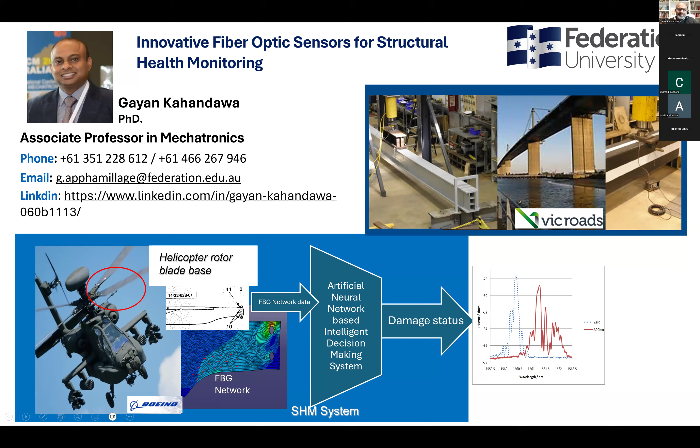But to start with, I will start with my location where I am, and a little bit about Federation University as well. Federation University is in Victoria, over here in Australia. It's the southern tip of Australia, and we have three campuses: one in Ballarat, one in Gippsland, and in Berwick. I am based in the Gippsland campus, but we work across campus many times. It really doesn't matter nowadays the location. That's the situation we have after COVID, isn't it?

So the university has a vision to develop a cooperative education model. That means all of our degrees are industry connected. Our students are industry placed and they learn from the industry as well. It's a little bit of a challenging model for the university, but it is giving us very good results. Our strength is mostly in applied research, particularly engineering, AI, health, and regional development. We have one of the highest graduate employability in Australia for Federation University graduates. We have strong relationships with industry, government, and communities, and we are committed to innovation, regional growth, and student success. So some of these photos I have put up there.

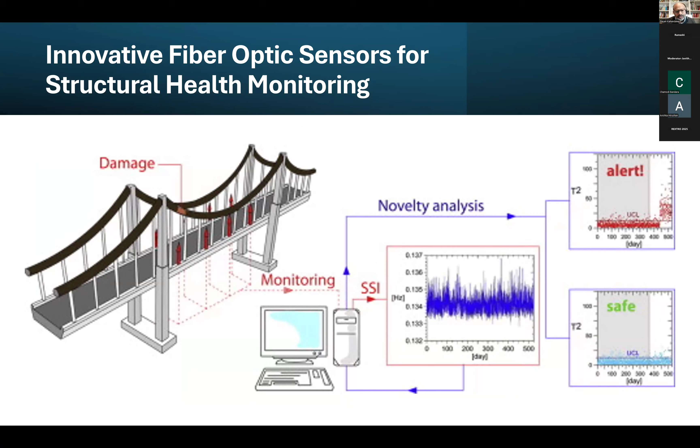introduce the fiber optic sensors, or we call it fiber Bragg grating sensors. Fiber Bragg grating sensor is physically, if you look at it, an optical fiber, right? If you are familiar with the communication industry where we use fiber for communication now, NBN, it's looking very similar to that fiber, right? But there is a slight change in the material.

In this fiber, we have a little bit of germanium. We call it germanium doped fibers. I will explain why we need a little bit of germanium in it. But if I don't tell you, you will think, okay, that looks like a normal fiber, right? So in this fiber, what we do is by using some radiation technique, we can create a grating in it, right? I will explain a little bit more in my next slide.

By creating this grating, what will happen is when we send light through the sensor or the fiber, because of the grating, part of the light will be reflected, right? So by looking at that reflected light, if you can understand the wavelength of the reflected light, we can actually get the idea about some physical properties closer to the sensor, right?

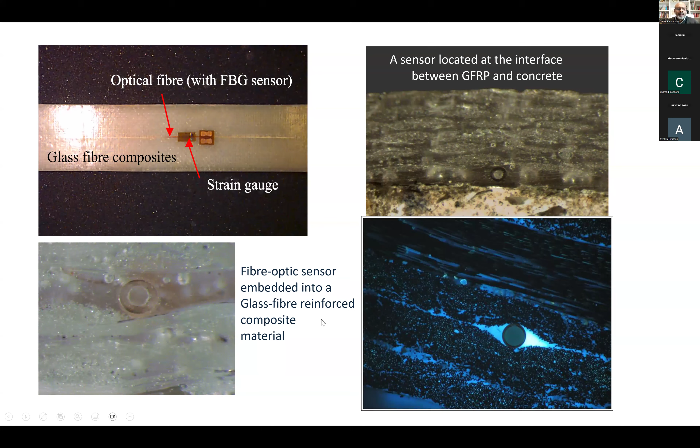So when we embed it, these are some of the samples we created just to see how the sensor is settling in material. So here you can see that's a concrete surface here, and then this is a glass fiber surface here. So we have put the sensor in the interface, and you can see how it is sitting there. And this is actually inside the glass fiber reinforced composites. So that's the sensor sitting inside the material itself. Okay, so that's a big advantage to have that ability to embed the sensors.

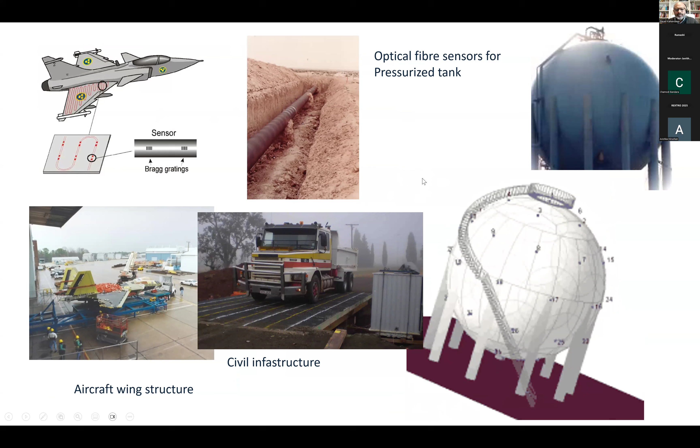So because of that, this sensor is used in many monitoring applications: in aircraft, in defense applications, pipeline monitoring, oil and gas industry monitoring, bridges, like civil structures. So many applications. All right, so when it comes to structural monitoring, there are two parts. One is the sensor part. The other one is actually the monitoring, or the intelligent part, smart part.

So it is more like we are developing a nerve system for the structures, right? So we have our nerve system. If I have a problem in my elbow, I will feel it as a pain or something, then I know something's wrong with my elbow. Then I can go to a doctor, do scans and find out what's wrong. So a similar phenomenon here. If an aircraft can feel its structure, if something's wrong over here, if we can detect that, then we can fix that.

So in most of the applications, because of not having this ability, we have to scan all the structure all the time. So aircraft undergo monitoring operations time to time. You have to take it out of operation and then, using ultrasound or different techniques, scan the structure for damage. That takes time, plus you are losing a lot of money because you have to take it outside the operations.

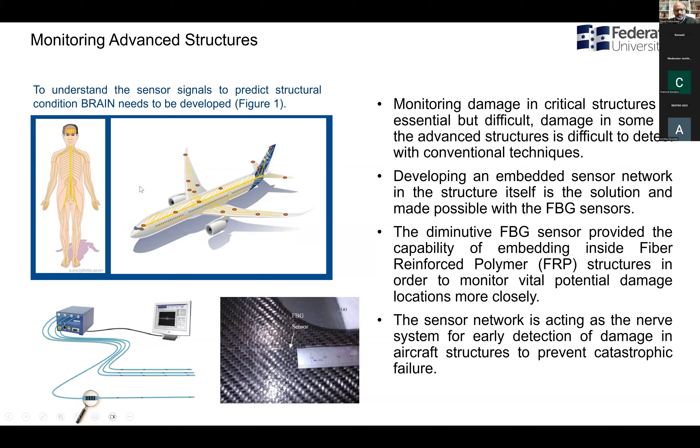But if you can have a nerve system which can detect the damage itself, then we know and we have the confidence to fly the structure. We know that it's safe. And if something's wrong, it will recognize it, and then we can fix it early, before it gets worse. Okay, so this is actually the idea of monitoring. So now I'm going to talk about a couple of projects where we use fiber optic sensors for monitoring.

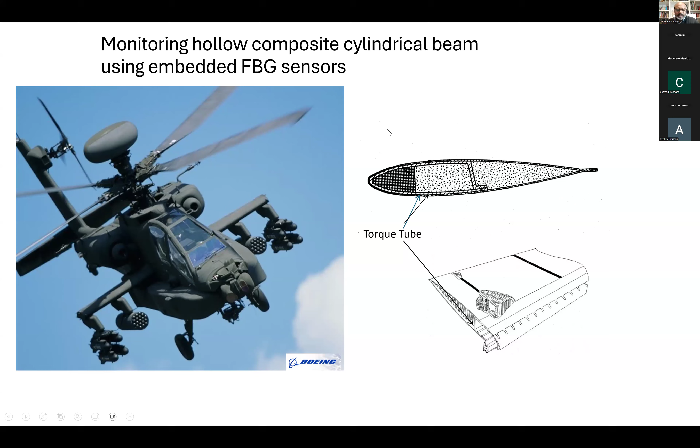This is part of my PhD project with Boeing. In that project, they wanted to monitor some of the aircraft structures and develop techniques to monitor those structures actively. So here you can see a cross section of a blade of a helicopter. Inside that one, they have something called a torque tube. The profile of the blade is to have the correct lift using Bernoulli's theorem, but the force is actually mainly applied through this torque tube. So this is the normal process when we want to do something like this.

So first we understand what is the part we want to monitor. And then we develop finite element models, and by running the analysis, we try to understand possible damage locations or stress concentrations. So if you realize there's a stress concentration over here, a possible stress concentration over there, then we try to put the sensors around that area. And then we create the samples and test them. So in these samples, we have the fiber optic sensors embedded.

Similarly, to simulate a torque tube, we created a sample, did the finite element modeling, and then put the sensors. Inside this, we have created damages as well. In composites, there are a few types of damages occurring frequently.

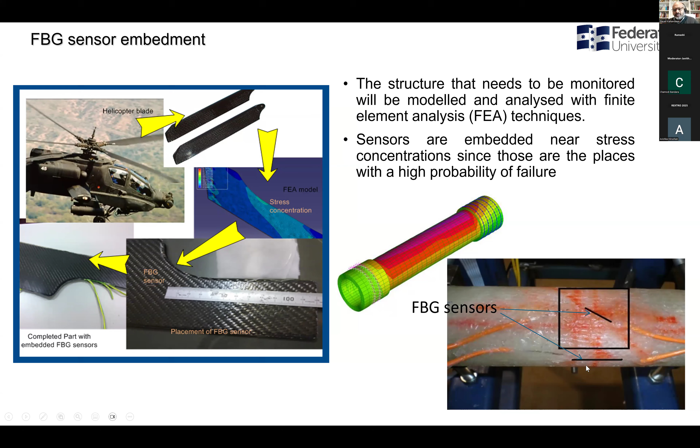One is called delamination. These are laminated structures, right? So there can be debonding between the two laminates. That's the defect. To simulate that, we can create a delamination, and then we put the sensors to monitor that delamination. The advantage with the fiber optic sensor is we can put it very close to the delamination rather than putting it on the surface.

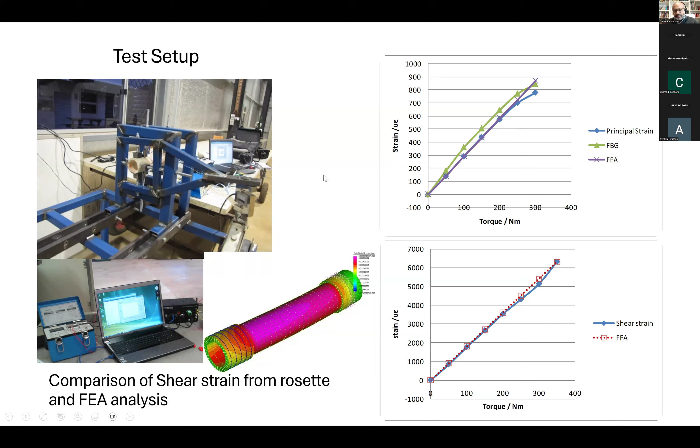And then we had to build our own rig because we need to apply the similar type of forces on that, and then we used the sensors to monitor it. At that time, for surface attachment, fiber optic sensors were working really fine, no problems at all, providing us with very accurate readings. But when we started to embed the sensors, we realized that we have more challenges. So I'll show you what was happening.

Even after embedding the sensors, we can see that the sensor spectrum is a little bit distorted. Normally we should get a very nice peak of the reflected light, but we started to see it is a little bit distorted now, as you can see here. And when we start to load it, that distortion is increasing. So that was an observation we found, and that was a challenge for us.

In this case, as you can see, it's further distorting, but still we can find where the peak is. By calculating the distance between the peaks, we should be able to still estimate the strain there. In some cases we found that there are multiple dominant peaks occurring. Here you can see there are two peaks now. Which peak to consider? One has moved to the compression side, the other one is on the other side. We started to observe these types of things.

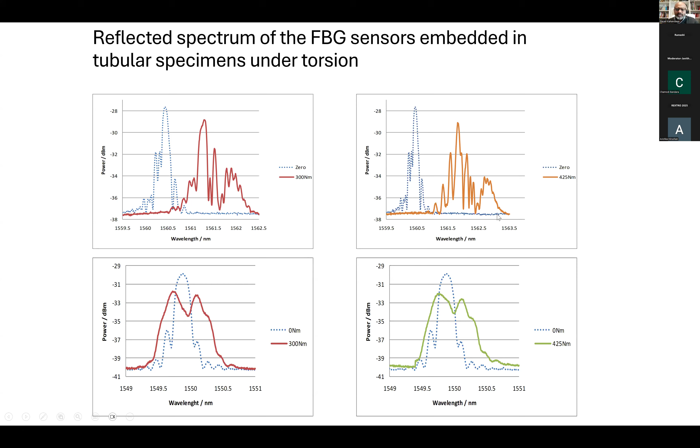That is where our research had to find new ways to deal with this type of sensors. On the surface, no problem, it's working. But once you embed in composite materials, we start to get distorted sensor signals. So we decided to go with some processing techniques. We were looking at AI at that time, how to use AI to help us deal with these types of distortions. And then there was another challenge.

We realized that if we want to feed this into AI, it's an algorithm run on a computer. We have a light signal here, so we need to convert the light signal to an electrical signal to record it. If you convert this to an electrical signal, whatever the reasons creating these distortions are going to vanish. We will end up with one voltage value, because we send this to a photodiode, or PD, and that PD will generate one voltage. That voltage may not mean anything because we lost all the information in the spectrum itself. So that was another challenge.

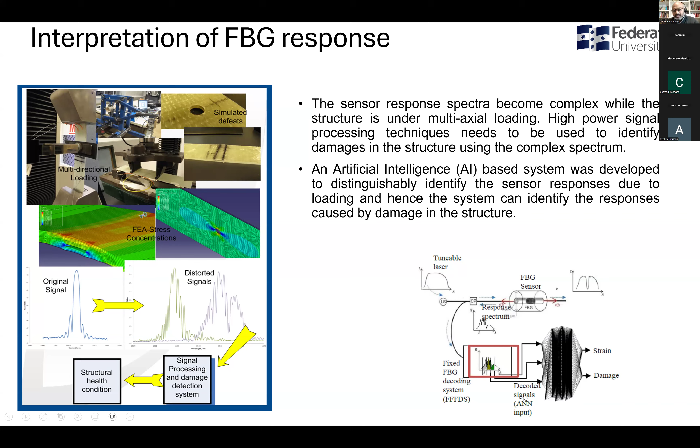At that time, there were a couple of research groups in the world trying to solve this problem, and we were in the same scenario. We couldn't find a way to go from here. And then by reading some other papers, we realized that if you can decode this signal optically, we should be able to record that and feed it into a neural network to understand the reasons or any physical properties we want to measure. So we decided to decode it optically and then use the decoded signal to train a neural network.

So this is what decoding means. Over here, that's the original signal. We send this signal through a few more sensors, acting like filters. This signal is fed through another sensor, which can only reflect this wavelength. So part of the signal will be reflected by this sensor, and some part will be reflected by the second sensor and the third sensor likewise. So we can have an array of filters to filter out the sensor signals. I'll explain it with this.

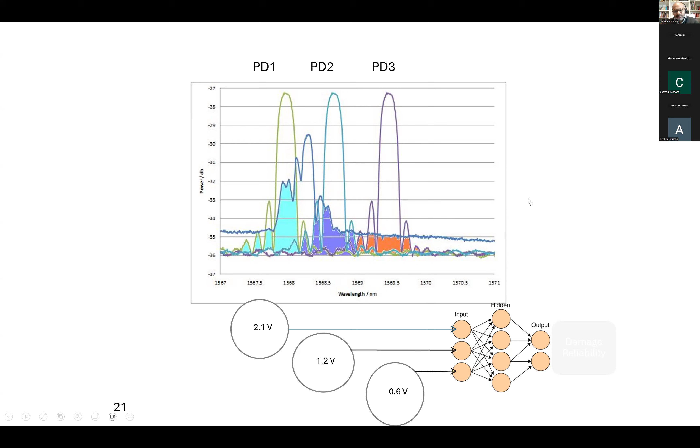Now you can see this is actually the optical circuit we have developed. We send the light to the sensor, and the reflected light is sent through another sensor, and that reflection is sent through another sensor, and that reflection is sent to another sensor. That's what we are talking about, decoding the signal.

So each sensor will be reflecting a different signal from the original sensor signal, right? And then each different filtered signal is fed into PDs separately. So instead of one PD reading, now we ended up with multiple PD readings, photodiode readings. That was used to train an ANN, or artificial neural network.

So the idea was, okay, we have our healthy structure. While it's flying, we record these readings and we train our artificial neural network using that original healthy data. And then as soon as we introduce damage to the structure, the pattern coming out of the PD is changed, because the spectrum is distorting further.

Which is very hard to find with our naked eye, because it's reading like a very irregular signal. We cannot see the change with our naked eye, but the AI managed to detect that changing pattern based on the damage. So we managed to detect the damages with very high accuracy by using this technique.

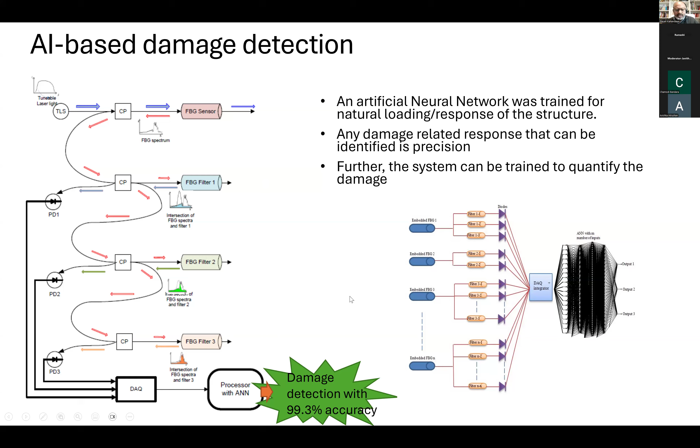So this was a breakthrough for our research, and ultimately this technology, all of this circuit and everything we did, was patented. Because it was with Boeing, we had to patent it with the US Patent Office, and this patent was granted in 2013. So now Boeing is the only company that can use this technology for monitoring. Okay, so that's one project.

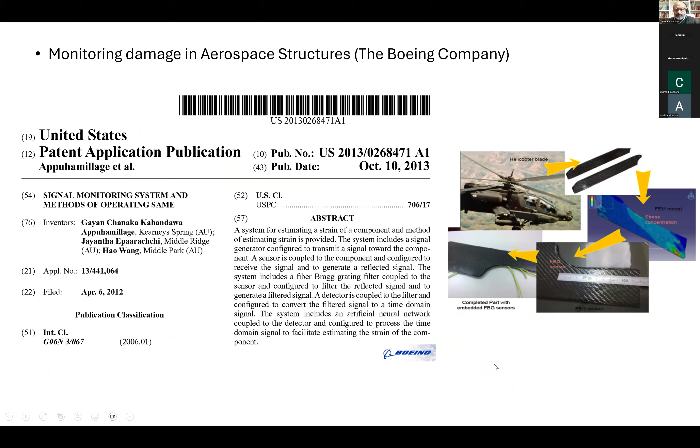And then another project, we had with Petronas, which is a Malaysian-based oil company. They have hundreds of kilometers of pipelines, and with time these aging pipelines are becoming corroded, thinning the pipe, and becoming problematic for them. So for them, we developed glass fiber wrapping to repair the pipes.

And on top of that, we started monitoring this wrapping to make sure that it is not going to fail, because the bonding between the steel and the glass fiber is the location we wanted to monitor. And also because of the thinning, the fiber will load up with the pressure. So we wanted to make sure it is fit for the job.

So similar to the previous application, finite element modeling, applying all the sensors, and then high pressure testing, all of those things, we managed to verify the effectiveness of the damage repair. Because without evaluating this type of technology, they cannot apply it in the field. So they need evidence. So that is what fibers can do. And on top of that, each repair can be continuously monitored using the sensors embedded in the repair itself.

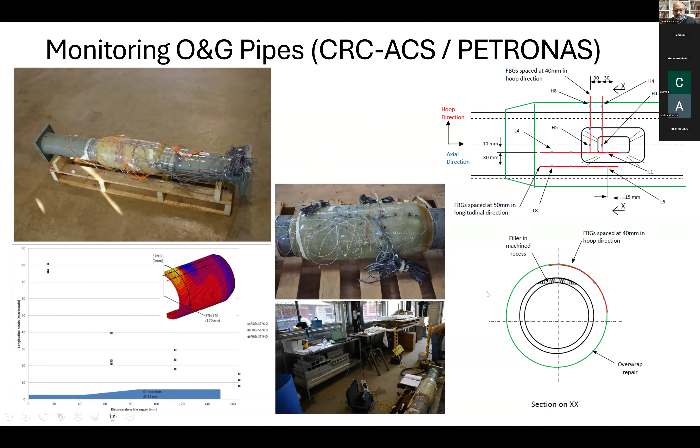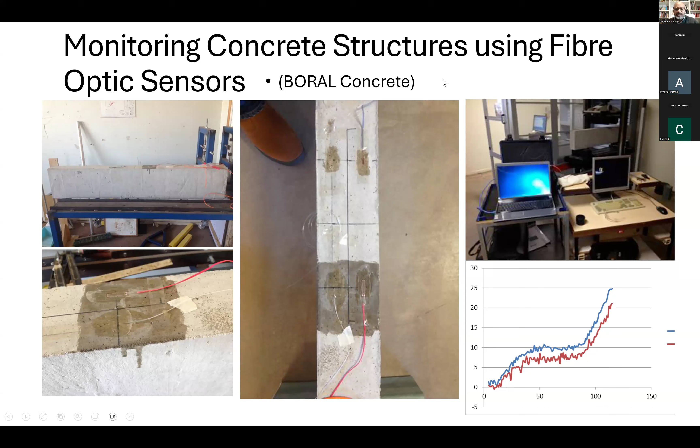So fiber optic sensors can be easily used with concrete to monitor the rebar concrete interfaces, or for many applications. Okay, that is a commonly used technique nowadays. All right, so now we are going to talk about composite bridges.

So in Australia, we have many bridges. Maybe even in Queensland itself we had 10,000 bridges or so. So many bridges. So maintaining bridges is a problem. So we were working on composite bridge girders. These are glass fiber girders, and we have done a trial to demonstrate that it can be used as a bridge building material.

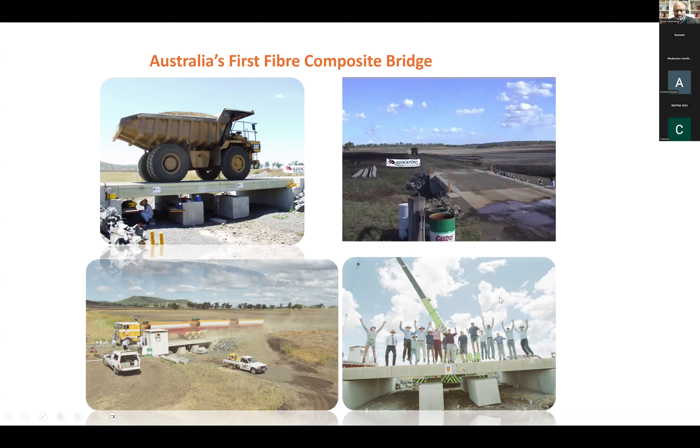Normally we build bridges with concrete or steel, right? So fiber can be used as well. Early days we did it with timber, so I'm going to come to that one as well. So in these beams, there were challenges when we use new material in engineering applications, because sometimes engineers don't trust these new materials, especially when it comes to fiberglass.

Civil engineers don't want a structure to fail as a brittle failure. They want to see yielding, right? Yield and then fail. But glass fibers, as the word indicates, are brittle materials.

It's glass, right? So the failure is brittle. So we need more confidence to use this material in civil applications, right? So that is where our next project is actually leading to.

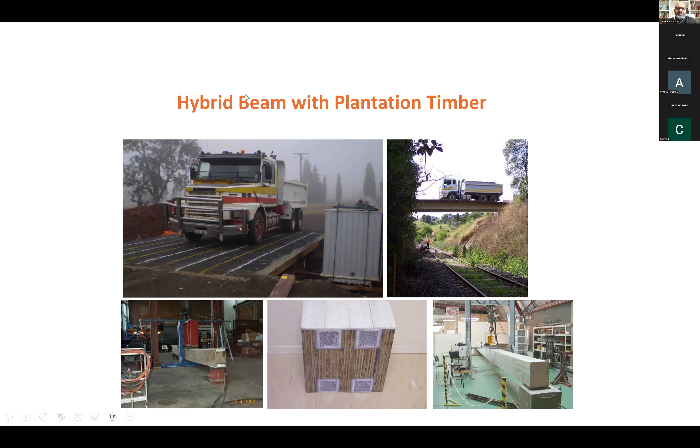So this project is with the Department of Main Roads, which is part of the Queensland government. It's more like the RDA in Sri Lanka. Each state has different road authorities in Australia. So the Department of Transport and Main Roads is the Queensland part of it.

So this department had to monitor about 3,000 wooden bridges still serving in the road network, right? Because Australia is so large, the original timber bridges are still there, and they're maintaining them. Replacing takes time, and we have to maintain those.

So the key challenge they had at that time was when they have a damaged timber girder, it was challenging for them to find a similar timber nowadays, right? Because the timber industry is now not as large as before, they couldn't find the correct timber, and they have 3,000 bridges to maintain. So they reached out to develop fiber composite girders to replace timber girders, right?

So it's not replacing the whole bridge; we are replacing one or two girders, as needed. And for that, we were designing fiber composite girders. Why fiber composite? There are a few reasons. One is if you use steel or concrete, they're too heavy, because these structures are not designed to take steel or concrete girders, right? If the girder is heavy, you have to replace the supports as well, which is expensive.

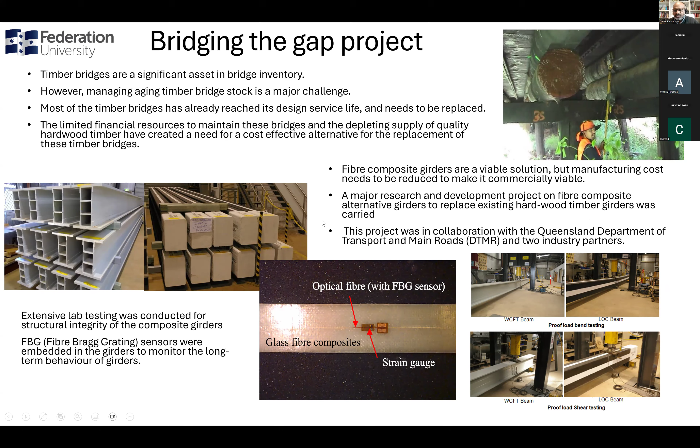On top of that, we installed the optical sensors in the girder itself for monitoring. Because, as I mentioned, the failure of these girders is brittle failure, right? When we did the destructive testing, it was really bad. It goes with a big bang and then it fails suddenly, because they are glass composites. So this is another project using optical fibers for monitoring the bridge girders.

All right, so this project here is the Westgate Bridge, the main bridge in Melbourne. It connects the west side of Melbourne to the east side. It is the main bridge, I would say. Without that, Melbourne cannot function. It's an aging old bridge, very high, because the port is on the other side, and the ships have to go through the bridge to get to the port.

And they had some issues. Because it's an aging bridge, there were some fatigue cracks starting in some joints, and then VicRoads, which is the equivalent of RDA again, the Victorian Road Authority, reached out to us to see whether we could develop a monitoring technique and evaluate the repairs they were planning to do to fix those problems.

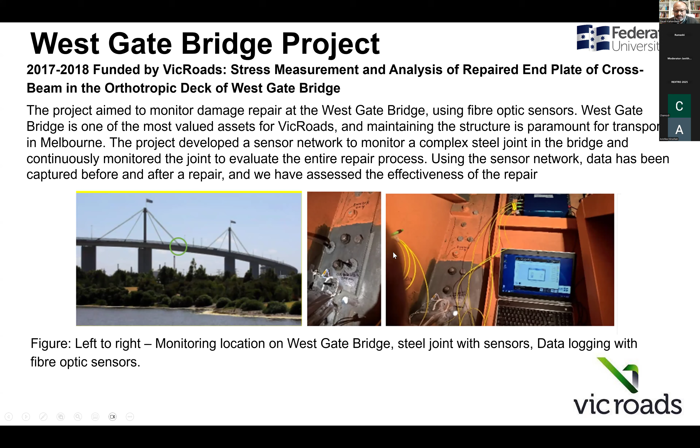So what we did, we went there and installed optical sensors on that particular joint. As you can see here, this is somewhere inside the bridge, and it's scary to see through these holes. I don't know how far it is. It's very high. And then we installed the sensors in a way that we can monitor critical locations. As I told you, because we can multiplex the fiber optic sensors, we had sensors on the same fiber.

So over here, this sensor is placed 4 millimeters from the weld line. The next one 6 millimeters away. So it's the same fiber. We wrote the sensors to the fiber in a way that we have the spacing. So it's very easy to install after that.

So we installed it, and then we mirrored it to have the redundancies and for comparison reasons. And then, excuse me, we monitored the joint for 2 weeks, even before the repair. We recorded the readings. We had about 12 sensors, right? And with the 100 hertz sampling rate, we were recording.

The bridge is live, traffic is moving. It's very, very difficult to close this bridge. If you close this bridge, Melbourne stops, right? So it's a critical structure. So we need to make sure we are not disturbing the traffic flow. So it was all live when we did this, right?

And then they did the repair, right? So they did some crack repair and put some resin to fill the gaps, and that repair was conducted. We still kept on monitoring the location, and we recorded for 2 more weeks after the repair as well, right? So now we ended up with a huge data set, before and after. Because every sensor records 100 readings per second, and we have 12 sensors, 1 month worth of data, right?

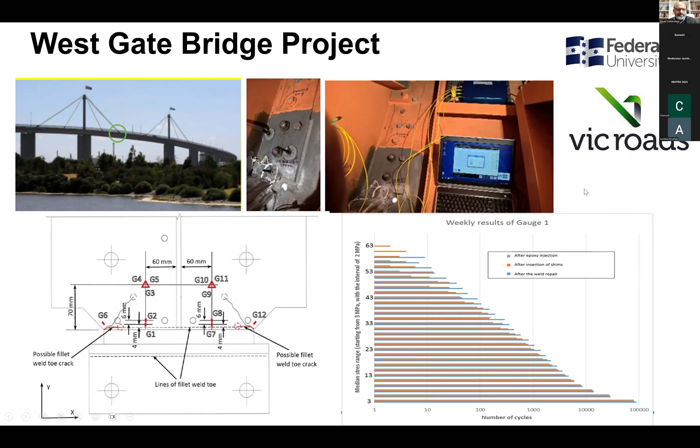For a very long time, we can use the same sensor for monitoring. We have to protect it physically. We have to cover it up and not let anyone damage it. If you save it physically, then the sensor will be safe, and we can use it for a very, very long time. Okay. All right. So the next application of fiber optics here is actually for brake pads, right?

So this is a company called Bendix. They are a brake pad manufacturer close to one of our campuses, one of the largest in Australia. They realized that with the increased number of electric vehicles, their business is under threat, right? Because electric vehicles mostly brake electrically and use brake pads comparatively less. So the brake pad wear is less. That means most of the time, electric vehicles may not need to change their brake pads for the whole life of the vehicle, right?

So they realized that they wanted to develop smart brake pads now. Even though it is a little bit more expensive than normal brake pads, people will buy it if it is smart brake pads. So we have actually used optical fibers, the fiber Bragg grating sensors, inside the brake pads, right? What we have done is embed the sensor in a way that with the wear, the sensor is wearing off as well, right?

Normally what we do is measure the shift of the wavelength. But in this application, we're looking at the reduction of the peak of the sensor, right? So when the sensor is wearing off, the signal it can reflect is getting weaker and weaker. So the signal is dying as well with the brake pad. So it's a sacrificial type of sensor. The sensor actually wears off with the brake pad, and then we don't need to use expensive equipment to read this.

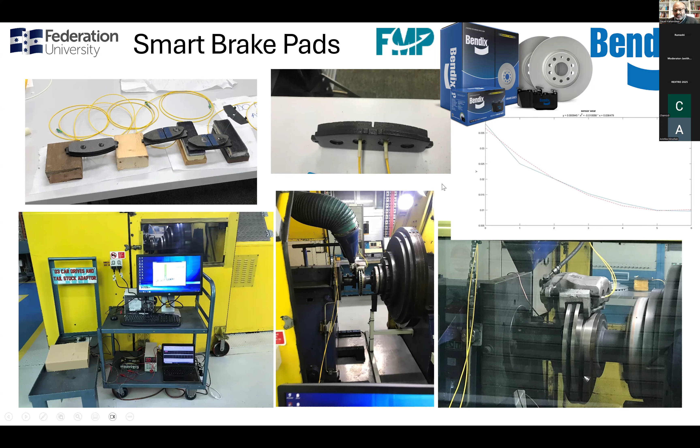And then ultimately, this project also ended up with a patent. This simple unit we have created can be used for monitoring the brake pads now. We don't need the expensive equipment. That is where the innovation is. We just need a laser and a photodiode, right? And then everything else is through the AI-based system, which actually estimates the remaining life and the temperature and all of those. Okay, so this is a recent one. So that's another application of fiber optic sensors.

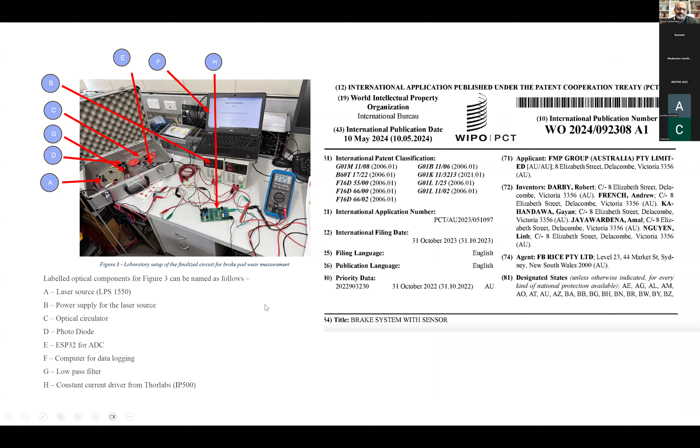All right. So the last application I wanted to talk to you about, I think we are almost reaching our time. It's actually a current project. It just started. It is in the race car industry. So we are trying to use the fiber optic sensors for monitoring the car performance, right? So in the racing industry, in each track, these vehicles' suspension and everything is redesigned to suit the track, right? So to do that, they need to understand what sort of loads are applying on the structure itself. So we are trying to use the optical sensors, and then while driving, we can record the stress values in that particular location they're interested in, and then change the suspension so that the forces are in their desirable range.

Okay, most of the time at the moment what they do is they heavily depend on modeling, like finite element analysis, and also multi-body dynamics software. But now we are trying to use the optical sensors, right? Because it's very tiny and you can have it running there. And nowadays we can have very tiny optical interrogators as well. So it can be there, and then some team members can monitor the strain values in real time while the vehicle is on the track, and then they can optimize the vehicle's performance accordingly. So this project is just starting. We have not even done data collection yet. So that's a very new project using fiber optics. So as you can see, the applications can be anywhere when you have these types of sensors.

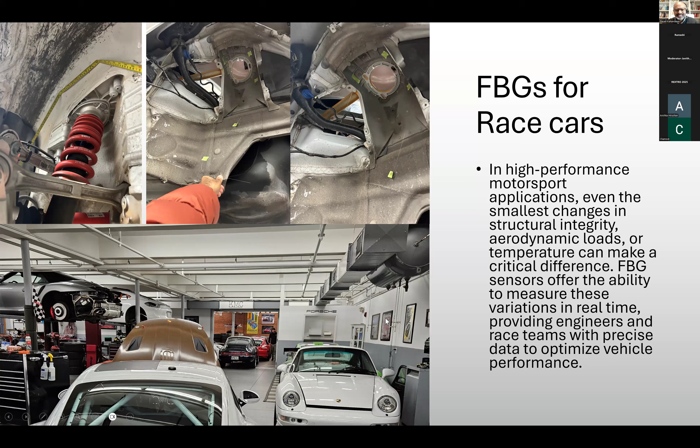All right. Okay. So that's actually the lecture part of it. I'm happy to take any questions. If you have any questions, please. I'm happy to answer.